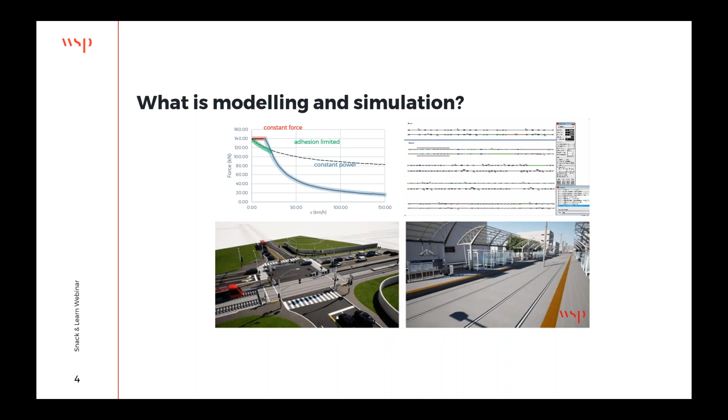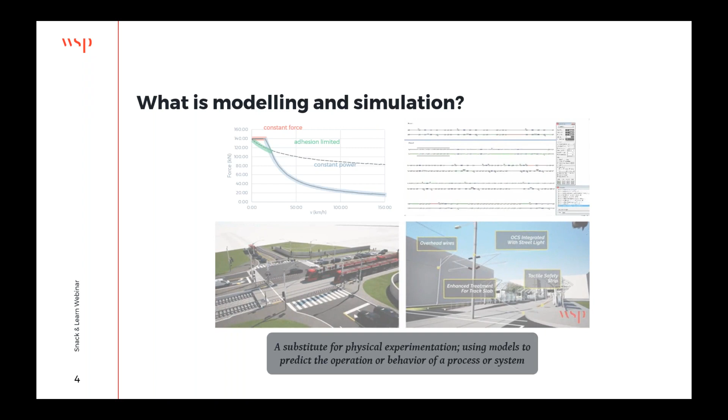So we would like to start with asking a fundamental question: what is modeling and simulation? What about a graph? And what about a plot, weather forecast, a 3D demonstration, aerodynamics? The official definition of modeling and simulation is that it is a representation of the real world using mathematical formulations. So a spreadsheet can be modeling. Weather forecast is a simulation. A mathematical formulation describing a relationship between two variables is also modeling. Trains running on a network is simulation. And 3D demonstration is also a form of modeling.

There are various types of simulations. On a macroscopic level, we use simulations for demand analysis, ridership forecast, and it focuses on overall performance using aggregated results instead of individual movements. And the key indicators often used include density and flow rates. On a microscopic level, we use simulations to study individual movements as well as their interactions with the surrounding environment.

There is also another type of simulation, which is called mesoscopic. It sits in the middle between macroscopic and microscopic. What it does is that it simplifies the part of the model that is less critical, while it is still able to produce detailed individual movement results as a microscopic model.

Looking from a project lifecycle perspective, modeling and simulation can be used in almost every major stage, from planning to design to implementation and operation and maintenance. The role of modeling and simulation changes drastically during each of these stages. For example, in the planning stage, data is extremely limited, and modeling and simulation can be used to validate and eliminate scenarios or design concept options that just don't make any sense. Whereas in the implementation or operation and maintenance stage, modeling and simulation can work hand in hand with the design and implementation team to implement an iterative design process to achieve an optimal design output and a focus on the level of service the system could provide.

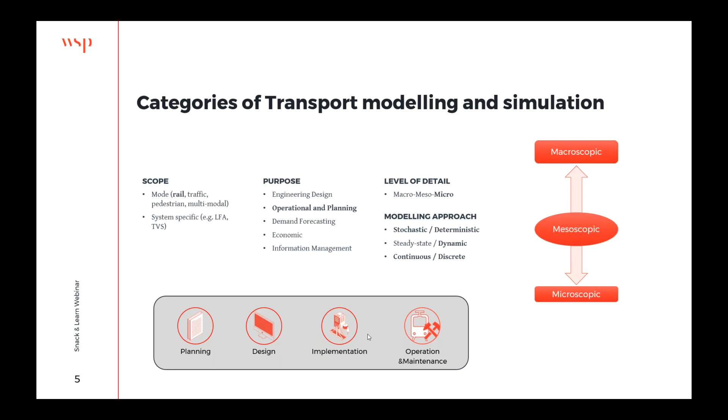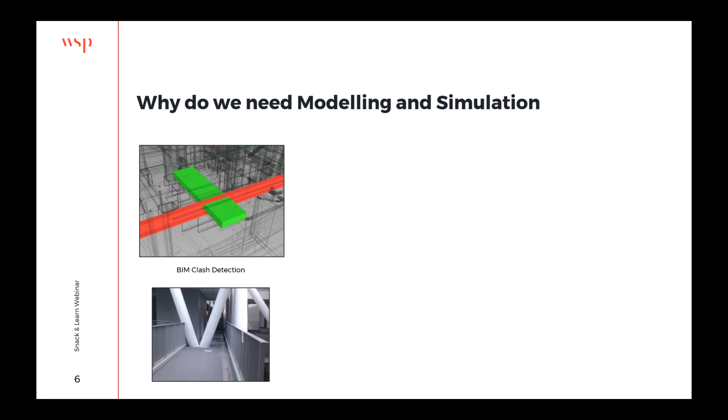Let me make a guess. Most of our audience today, I guess you're very familiar with clash detection from BIM, which is Building Information Modeling. So as you might know, the key purpose of clash detection is really to use software to detect if two or more elements in your design take up the same space. What will happen if we don't do clash detection? Well, there is a real life example, which I found on the top 40 engineering design fail list. The consequence of not doing analysis or spending effort at an early stage is usually very pricey, especially for large scale infrastructure projects. The same could apply to railway operation projects.

We do rail operation simulations to evaluate if the proposed timetable would work in real life. And if we see conflicts, we try our best to resolve and update the service plan to minimize the systematic failure from an early stage. And if we don't do it, or the analysis is not comprehensive enough, we might end up causing delays to thousands of commuters who rely on the systems every day.

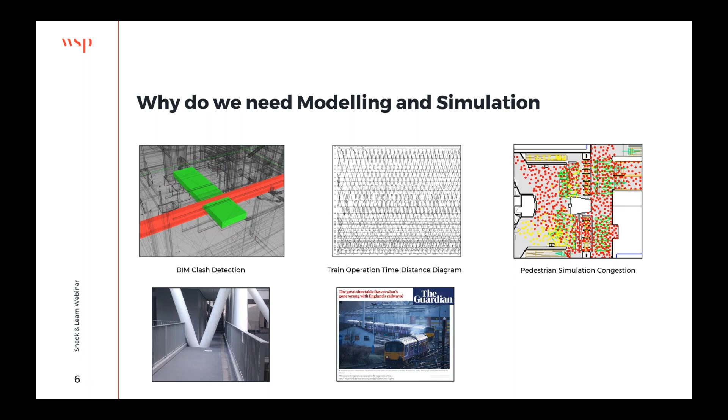And similarly, we look at passenger circulations, passenger flow at transit facilities, and detect if there is any bottleneck or choke points in design, and we catch them at an early stage and improve it. If we don't do it at an early stage, in real life, we would have overcrowded platforms that even pose safety risks for any passengers or customers that rely on it.

So we all know that as the project lifecycle progresses, we have less and less opportunity to change design elements, and any changes at a later stage could incur a large cost. Once design is implemented, it's almost always very costly to rectify the situation once it occurs.

While the benefit of using simulation is that we're able to catch this at an early stage and come up with plans and design changes to address these issues so that we can save money as well as ensure customer safety and provide a preferred level of service the system can offer.

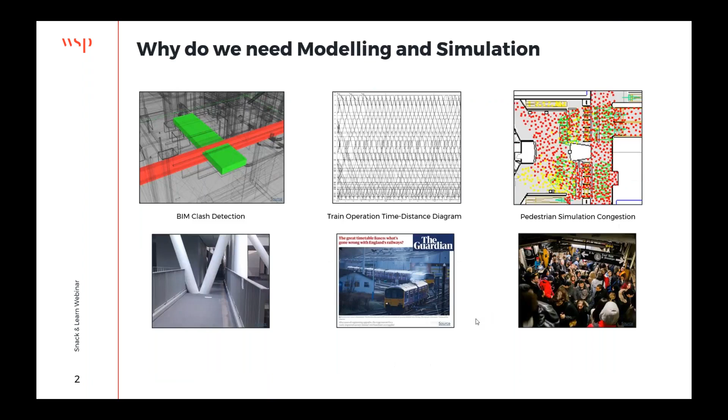So at WSP, we recognize the importance of modeling and simulation, and we think by having such capabilities, it would really help us to add value to the project and help our clients be future ready. Our modeling and simulation team sits within Rail and Transit Canada.

Currently, we have around 30 members across Canada to support our work, and we offer 4 main services, including rail operation simulation and analysis, traction power load flow simulation analysis, pedestrian simulations and passenger flow analysis, and last but not least, 3D modeling.

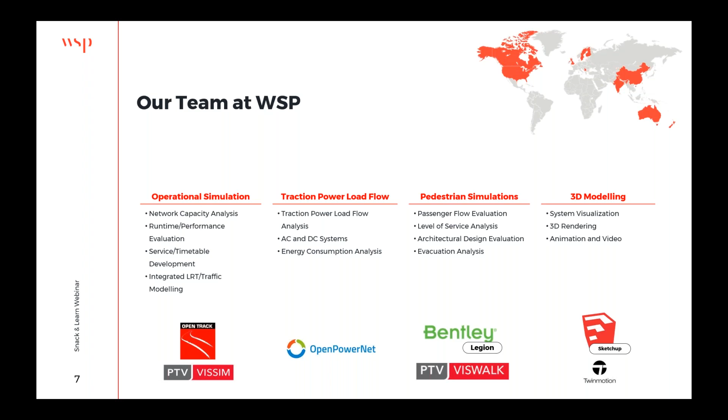I also want to point out that WSP has modeling and simulation experts located across the globe with expertise and experiences in different types of transit systems, as well as various standards and applications. And we have a global network that allows us to share our point of view and experiences which might benefit the project in other regions.

Throughout the years, our team had opportunities to get involved in many exciting projects. So we just list a few on this slide. For City of Edmonton, we mainly focus on its LRT systems, where we perform operation analysis and pedestrian modeling projects for some of its network and the stations.

For TTC, here in Toronto, we have projects for subway lines as well as streetcars, where we performed rail operation analysis and concept of operation plan development and LRT operation performance analysis, as well as the streetcar load flow study.

For Metrolinx, we are heavily involved in its subway extension program, providing operational analysis, concept of operation development, and most recently, we're very proud to be part of the ONxpress team, who will be delivering the GO Rail Expansion On-Corridor Works project.

So this is actually a very good segue where I'm going to hand over to Ahmed, who is the project manager for the WSP-TSP development team for the ON-Corr project, to provide a bit more insight. Thank you, Yishu. So next slide, please.

Thank you. So to start, I would like to give a high-level overview of the Metrolinx On-Corridor expansion project in general, and describe why this recent bid proposal project on our part was a significant example of how our team's work has been pivotal in the overall design process of major transit design projects.

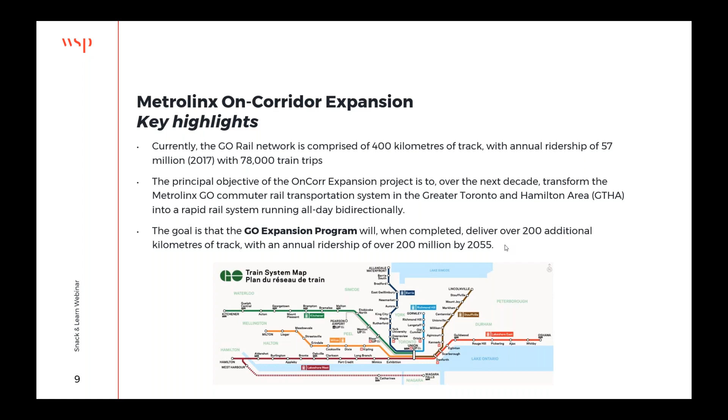So to communicate this ultimate vision of the project, the Ontario provincial government clearly defined the requirements and objectives within the released RFP and companion project agreement documents, which were tendered to the public. Next slide, please.

And WSP partnered with several other firms in a joint venture agreement to submit a bid proposal for this landmark contract. The comprehensive bid submission package was very extensive and was required to include plans and design documents for all aspects of construction, deployment, and future operation of the proposed upgraded system.

And this included, for example, architectural drawings for all stations to be upgraded, detailed track alignment drawings for all the guideway upgrades planned, traction power system design, and phasing plans for the electrification.

Proposed vehicle configurations, fleet and crew rostering plans, upgraded signaling system design, as well as a complete 48-hour timetable provided for the key years throughout the target time period of 2025 to 2056, as well as incorporating passenger flow data and much more, actually. So it's a very, very large and comprehensive design package to be submitted for the bid.

And as you can see, all of these elements were inputs to the operational model and simulation activity that we provided for the team. So one of the key requirements was obviously to submit a compliant and design-representative OpenTrack model and corresponding train service plan, consisting of timetables for the key service years I mentioned, which were 2025, 2032, and 2056, and also incorporating the fleet configuration and consideration of all third-party rail usage for freight and intercity services.

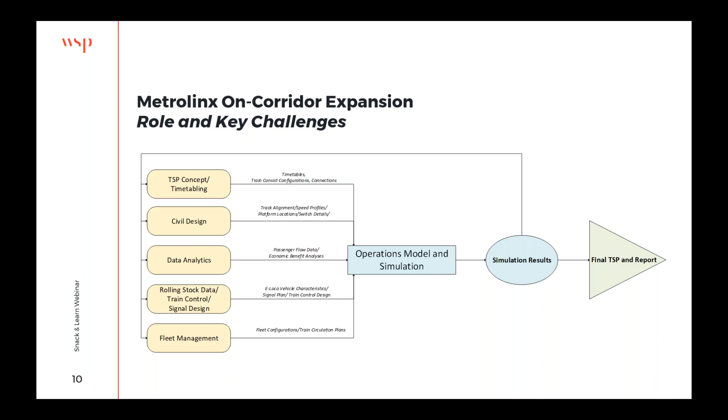So this complex and challenging bid proposal took 2 years to prepare and submit, and consisted of significant design work from multiple disciplines, and the ultimate convergence of all these designs in a comprehensive manner were incorporated in the model that we developed and submitted to the sponsor, and demonstrated that the holistic design package was feasible and compliant to all the requirements in the project agreement, and the projected performance of the proposed solution was meeting or exceeding the targets from an operation perspective. So next slide, please.

So as I mentioned, our responsibility as the WSP modeling and simulation team within the bid development effort was the formation of the model, as I described, which would represent the integrated system design proposal as a whole, and we could simulate the correlated service scenarios for all the key years that we had to propose train service plans for, and would provide effective data for analysis and validation of the compliancy, feasibility, and performance.

The main challenge in this process was to maintain the integrity of our model throughout the design process, regarding the accuracy represented in the model of all the design data, which was a combination of existing as-built data as well as our proposed design data. And this was crucial to meaningful evaluation of the design as a whole, and for each iteration, and crucial to providing vital feedback to the design teams throughout the process to provide any corrections that needed to be made.

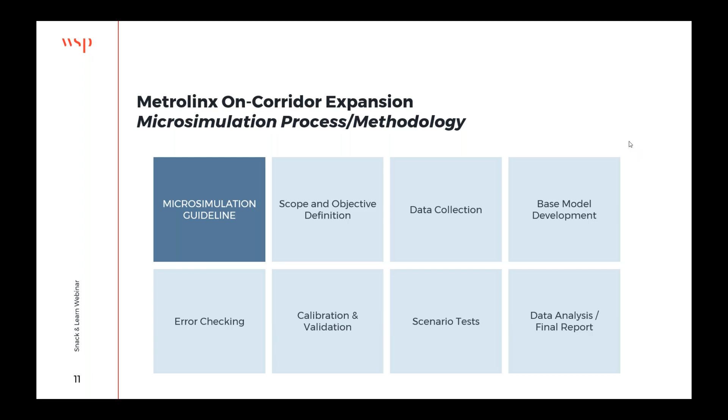However, to achieve the bid development goals under the circumstances and within the aggressive timeline that we had, it was necessary to give the process a bit of a turbo boost, which was done primarily through innovation in process and tool development. Thank you, Yishu. So the output data of the industry standard software tools used for the macroscopic timetable development are not readily compatible with the input formats that we require for the microscopic simulation software that we use, OpenTrack in this case. So as a result, historically, the integration of timetables and the micro simulation operational models required a lot of manual intervention and data formatting at every step.

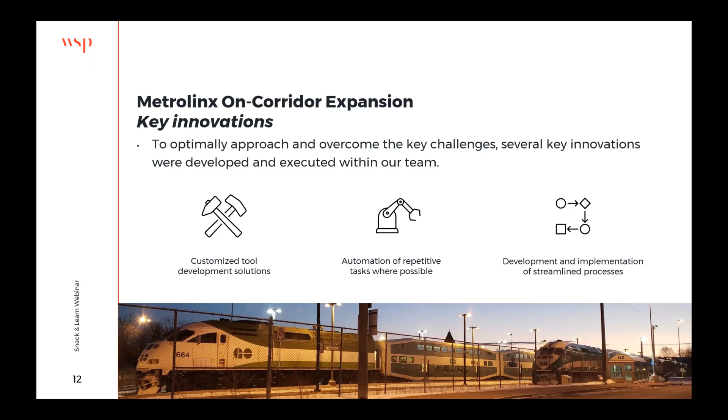So to mitigate this bottleneck in the process and meet the project requirements and timeline, we developed several tools, data processing tools and formatting tasks were automated, and the detailed modeling processes were developed further and refined to find any efficiencies that we could. Next slide.

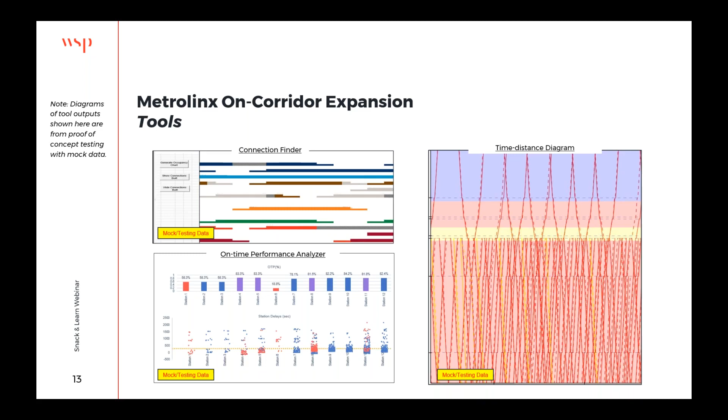This slide shows some of the visual outputs that our in-house tools produced, which were extremely useful in automating the finding of connections between interlining train courses, for example, evaluating the on-time performance against the PA requirements incrementally throughout the bid development process to give us instant feedback on how the TSPs were performing, and also generating enhanced time-distance plots that you can see on the right, which were vital for investigating and resolving any deadlocks or critical delays that we were seeing in our simulations of the operating plan. So that, in a nutshell, is the application of our expertise to this project.

And in addition, I wanted to highlight some of the future-ready aspects of this project, starting with the growing transit ridership demand relating to the population growth in the Greater Toronto and Hamilton area occurring now and over the next couple of decades. Our team leveraged the modeling and simulation techniques to assess the various infrastructure development concepts and propose a reliable and high-frequency service plan to exceed our clients' expectations and deliver a greener solution for transportation in the region.

The electrification of the network will also reduce greenhouse gas emissions and air pollution. And as a part of our service plan development, our team supported the rail network electrification concept by demonstrating the operational benefits of using electric trains, and operating high-performance electric locomotives was proven to be an essential provision to the high-frequency service we wanted to provide.

For data management and analytics, the design development heavily relies on data collection, coordination, and stakeholder engagement. Therefore, WSP contributed to 2 areas of the infrastructure improvement and operational concept design, using ProjectWise and BIM 360 platforms to store and manage CAD drawings and design data and assign metadata to design files that streamline the multidisciplinary collaboration effort. It was very pivotal in making sure that this would be a future-ready project.

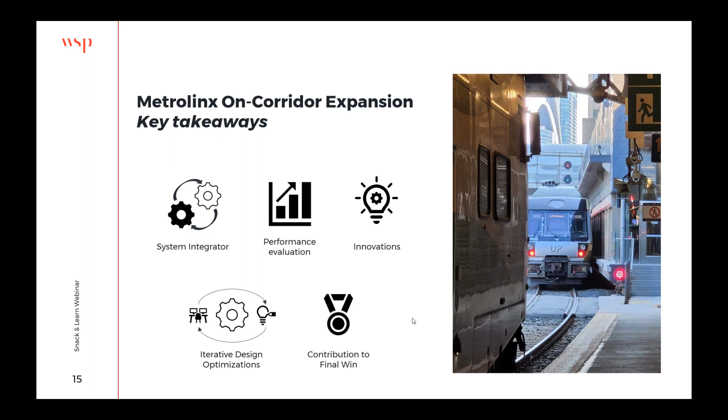And at the end of the day, it was actually very pivotal for our winning of this contract, because it's an operationally driven concept that we're proposing, and being able to demonstrate the feasibility and compliance and performance from an operation perspective was the selling point for the client, and was a major, if not the main contributor to our ultimate win. Thank you. Next slide.

So in general, modeling and simulation can be applied to multiple areas of the transit design process. As mentioned before, the 4 main areas of modeling and simulation that we apply right now are operational performance evaluation, traction power design, pedestrian flow evaluation, and 3D modeling and visualization. So value can be added at every stage of the design process through modeling and simulation. It is becoming a more recognized and required aspect of the design process in the industry as a whole, and it's good to be on the cutting edge of that trend.

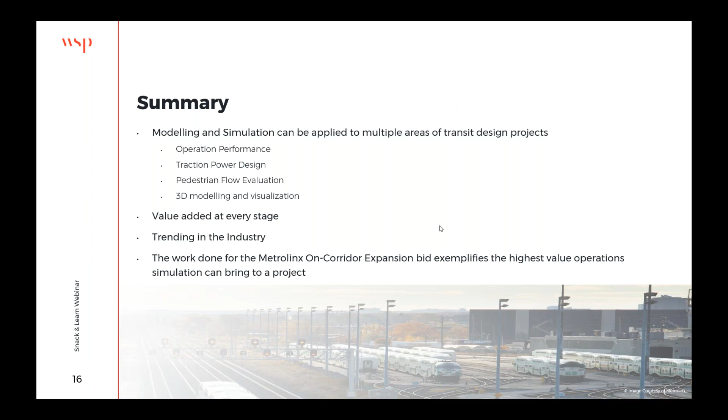And this project, the Metrolinx on-corridor expansion bid, really exemplifies how we can bring the most value to a design process through operational modeling and simulation. And that's it. Thank you. So now we'd like to open the floor to any questions that anybody may have regarding this presentation and the topic in general.

Perfect. Thank you, Ahmed and Yishu, for a fantastic presentation. Sorry, losing my voice. It will be great to see you guys if you can open the webcam, and thank you for sharing with us this impressive project.

I will start with the first question. What is the process for validating your model against real world data or design inputs? Do you want to take that, Yishu, or do you want me to take that? Sure, I can take that one.

Okay. So the process of validating the simulation: there's always the input for the simulation data, right? So you take the input from, could be, a manufacturer's spec sheet or somewhere, and then you put it into the simulation model, and use the simulation model to produce some sort of outputs based on the parameters and algorithms or the mechanics you have built into the simulation model, and then use that output to compare with another source of truth. So for example, it could be the real world data from the train operation, or it could be a travel time from one station to another station.

It could be a journey time for pedestrians moving from one key location to another, and you can use that data either individually or aggregated. Usually it's aggregated to look at the overall performance, and you define a certain criteria, the convergence criteria. As long as you fall into that category, you can consider the model to be validated and reflecting the real world properly. There are a lot of different methods and ways to do that, and there are actually quite a few studies out there.